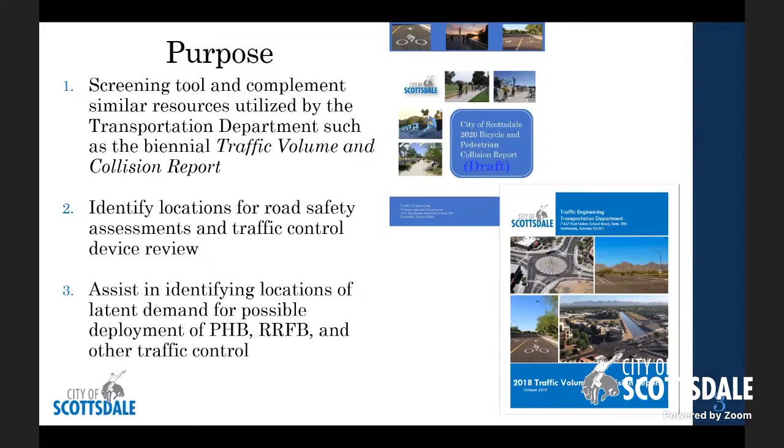Next, identify locations and corridors for capital improvement project investment. The next point is an important one: assist with identifying improvements necessary with private development. Having this data, having these kind of hotspots that we're anecdotally familiar with, but now that we have the data to support these locations, can help us in pre-app and development review meetings in order to identify these improvements that we could partner with our private development community.

Provide better, more targeted education and enforcement, and influence the design of new facilities. Pragmatically, this is a request that was brought forth from the Transportation Commission some time ago, and it's also been the desire of transportation management and staff to have this document in hand for the purposes that I just discussed.

Quick history: the last attempt to quantify our bicycle and pedestrian collisions occurred in the 2008 Transportation Master Plan, so nearly a dozen years ago. It was a good effort looking at a 10-year collision history by the number of collisions, by the severity, and again it was tabulated within the master plan. But there was a desire for management and staff and the Transportation Commission to get something that was more robust, more comprehensive, and more complete.

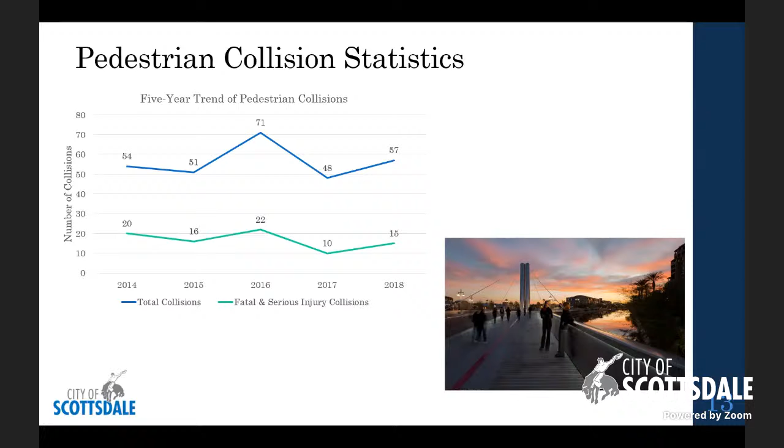So this is the 5-year trend of pedestrian collisions, similar line chart. You'll see the blip in 2016 and then back down in 2017, which would speak to this data compilation effort maybe being once every 3 years or every 5 years versus every 2 years for our vehicle collision manual.

281 pedestrian collisions over the 5 years, 56 annually. That's less than our bicycle collisions. That was kind of surprising.

63 serious injuries, 19 fatalities, and pedestrian collisions accounted for 1.3% of collisions over the 5 years. That second to last bullet I noted in bicycle collisions, I think bicycle was 4%, but 16% of pedestrian collisions involved a party that was impaired. So 4 times the number. I thought that was an interesting stat.

It is important to note at this point in the process of finalizing this document, no definitive conclusions have been drawn or derived as to why these things have occurred. I think that's an important conversation and discussion moving forward. But at this point, this is merely a data compilation effort and getting a final draft so that we can have those conversations moving forward.

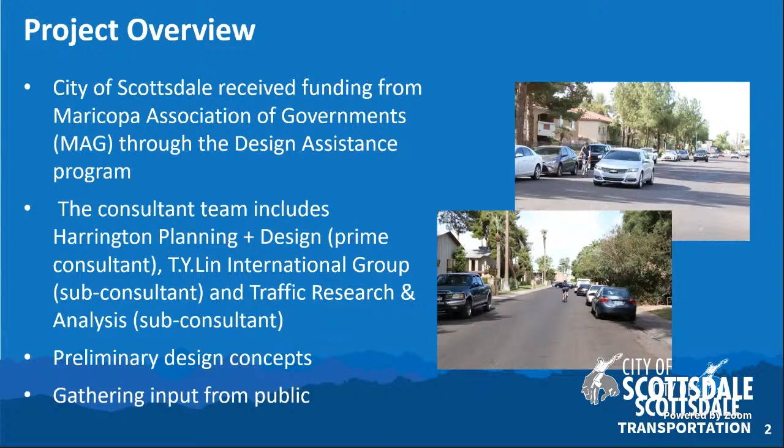The project is along a 2.5 mile corridor on 70th Street from Roosevelt Street and Continental Drive in the south at the Tempe border, all the way up to 2nd Street in Old Town Scottsdale. This is only within existing city right-of-way; we're not looking at anything outside of that. It's considered a low stress neighborhood route, and it connects a lot of other things, such as the existing bike route along Roosevelt Street in the south, the existing bike lanes on Indian School Road in Old Town, as well as the path along the Arizona Canal at the north end, and some upcoming bike lane projects on McDowell Road and Thomas Road.

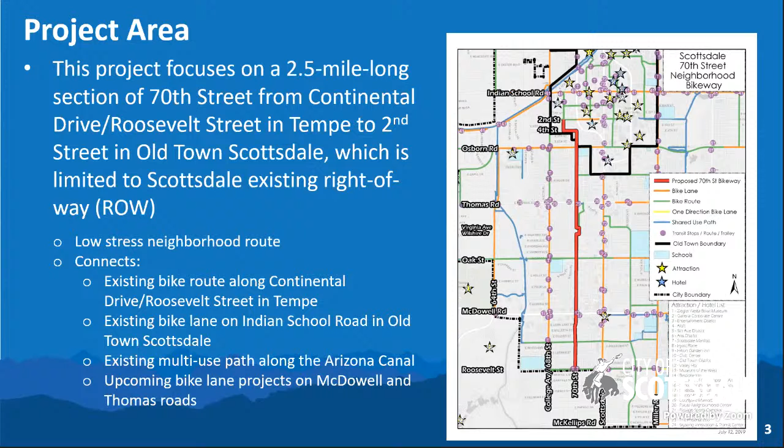The long-term goals for this include improving bike and pedestrian comfort, considering expanding traffic calming to bring vehicles to the proper speed, providing wayfinding and route signage to help people navigate through that area and route, some ADA connections and improvements, and really providing biking and walking connections to Old Town Scottsdale from the neighborhood.

Taking you to the project segments. Each area is a little bit different, so the consultant team divided the projects into 5 segments, characterized by how wide the existing right-of-way is in that area, as well as the adjacent types of land use. Starting from south to north, segment 1 is primarily single family homes in that neighborhood. Segment 2 runs from McDowell to Wilshire Drive, just south of Thomas Road.

Segment 3 is primarily an alley segment that was part of an earlier study several years ago. From Thomas Road to 4th Street, we start getting into more multifamily development from Thomas up to 4th Street. Segment 5, we've just recently changed this alignment. It'll continue going north up to 2nd Street. Before, in the early stages of this study, segment 5 was looking at taking a jog over to 69th and 4th Street up to Main Street. It just didn't end up being feasible. The team has looked at typical constraints in each segment.

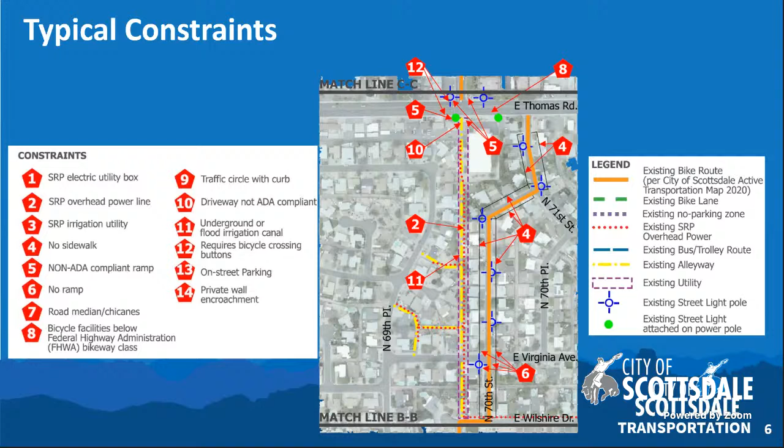Here are some images of those typical constraints, things such as the narrower width of some of these roads with on-street parking, which doesn't maybe give a lot of space for the bike environment. Also, there could be utility equipment that may limit the concepts that they come up with. No route signage or wayfinding, so if someone doesn't really know that neighborhood, they may not know that it can lead all the way from Tempe to Old Town easily. And then some sidewalk gaps.

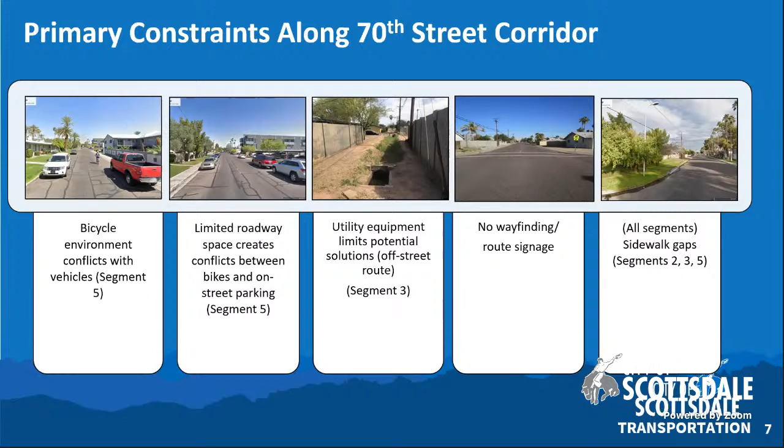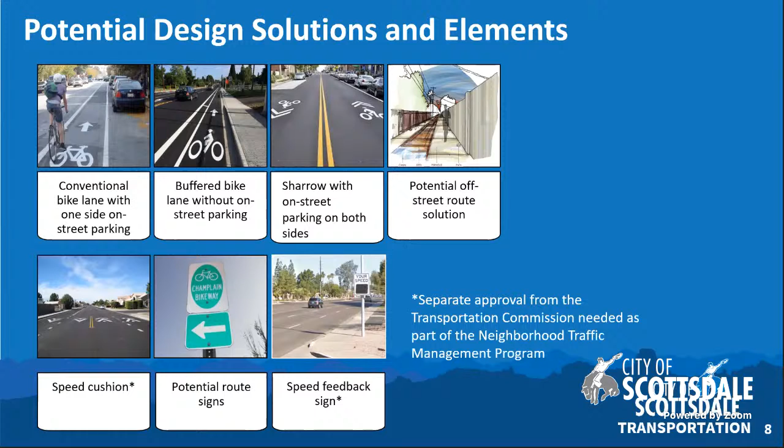They did come up with some potential design solutions to consider, such as a conventional bike lane, buffered bike lanes that may or may not have enough room for on-street parking. We're not considering removing parking as part of this, so part of the analysis has really looked at where do we have room to have both of those types of things, as well as sharrows when there's not enough space for any kind of striped bike lane or buffered bike lane. The different off-street options for the alleyway, things like speed cushions, speed feedback signs, those would need to receive separate approval from the Transportation Commission due to the policy for the neighborhood traffic management program. And then again, things like route signs to help direct people.

The public input that we've had so far was a virtual open house from November 17th to the 30th. It included most of the slides you've seen here in a recorded video presentation, as well as a questionnaire. We did have a pretty high number of responses - we received over 160 responses from people. We did a mailing and electronic notifications about the public open house so that we could spread the word.

Next steps would include reviewing this public input, further development of the concepts and ideas, an upcoming open house, tentatively probably going to go up for 2 weeks starting next week. And then the team will produce the final report for staff to utilize. From that point, moving forward into the future, any additional design or construction would need to receive additional funding, go through more public outreach, and the future improvements could happen in phases as well.

So if you need me to go back to any slides or if you have questions or comments, I'd be happy to answer your questions.

Thank you, Susan. This is Terry Anderson. Very, very informative presentation. Thank you. Good overview. Does anybody on the committee have any questions of Susan on this topic?

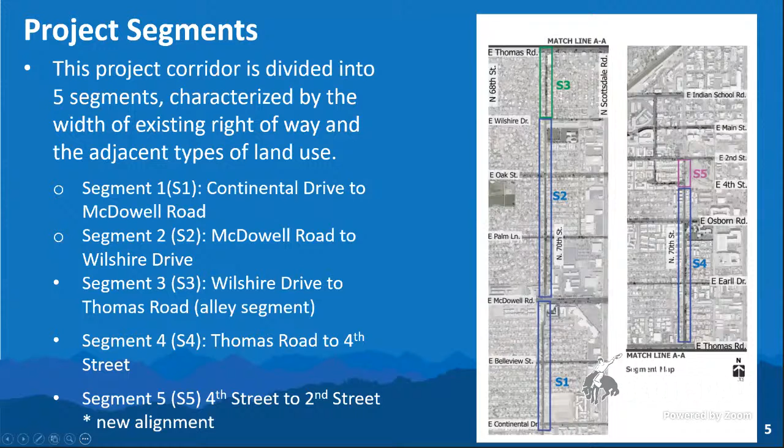Any other questions from committee members? If I don't see any hands, we'll move on down the road, to item number 6, the Old Town Bicycle Master Plan.

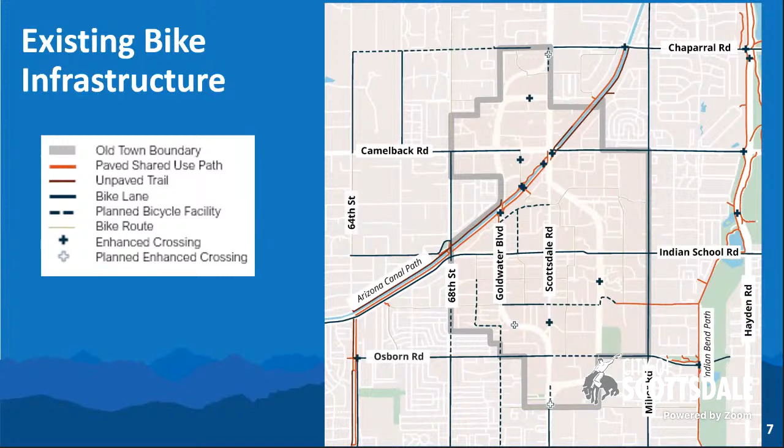I wonder if it had a dashed red line along that route you're talking about that zigzagged going east-west. Oh, okay, is it this gap analysis one that has the dashed line? No, not that one, I understand that one. It's this one, this one.

That alignment right there showed up dashed on two exhibits, and I wasn't sure what it meant because it wasn't in the legend. Oh, I'm sorry, I must have translated something different when we made the PDF. There were additional slides with this one, if we were going to go into more detail, where as we clicked through, the one we were talking about showed up as dashed just so you could identify it on this map. I wanted to shorten it for today, so that may have happened after you received your packet, but there's not any different alignment or anything that would have been shown there.

Thank you for asking, thank you too. Very, very informative. Any questions from any of the rest of the committee members? Well, thank you, two very nice presentations. We appreciate that.

Moving on to the next item, other transportation projects and program status. All right, thank you. Greg Davies is going to join for a few of these slides, but we just have a short update for you.

So Greg, just let me know when you need me to click through. Okay, thanks Susan. Good morning, Chair Anderson and members of the Paths Trails Subcommittee. I'm Greg Davies, Senior Transportation Planner with the City of Scottsdale, and today I'm going to give you a brief update on one trail rehabilitation project, a trail maintenance project, and two new construction trail projects. I guess I'm the trail guy, so I'll talk about trails, which is a very interesting mode that we have.

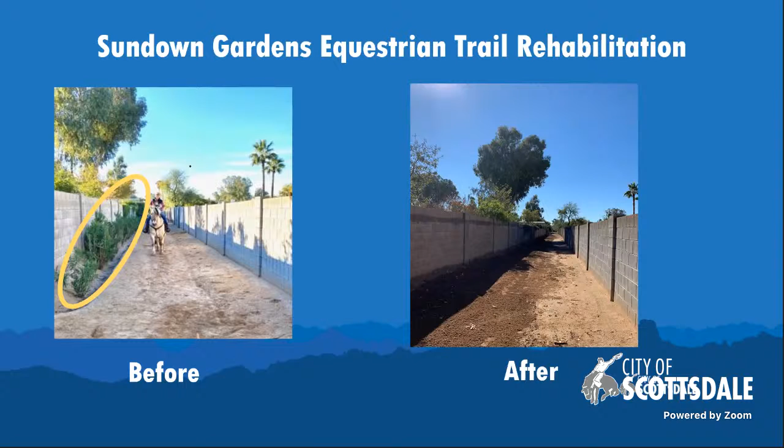There's a lot of equestrians in this area, and it connects to the Via Donna Trail, which was built around 2007. The Via Donna Trail runs east and west from Scottsdale Road to Pima Road, a very highly used trail. So that's the Hayden Trail rebuild - this will take place probably by the end of this month. I'm working with the contractor on that; he's going to give me an estimate, and we're getting very close to making this happen.

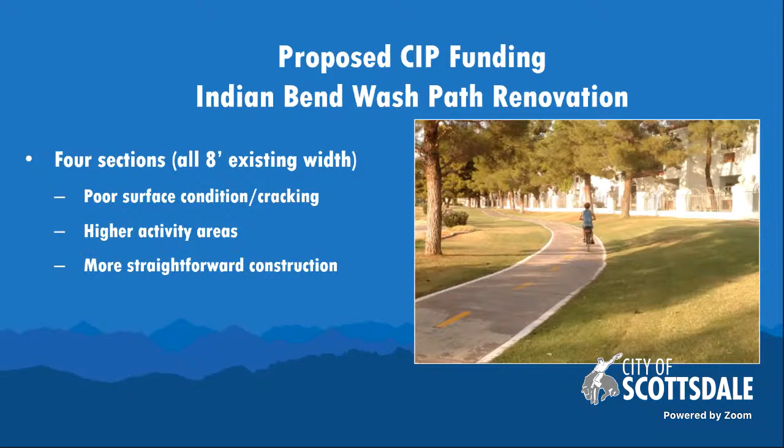A scooter ordinance update: Mark Melnichenko presented an update to the city council on January 19th. This included proposed updates to the city code relating to bicycles, e-bikes, and electric scooters, as well as introducing a draft ordinance on licensing for shared device providers to get feedback on what could happen with a future license. City council unanimously approved tabling any action on this item during that meeting so staff could return in the future with changes. There was feedback primarily about proposed parking restrictions for scooters, as well as sidewalk riding within portions of Old Town, plus other feedback from city council members. Staff are gathering more information and looking into further development of the draft licensing ordinance, since we were given comments on that, and we'll have updates in the future as we move forward with those changes.

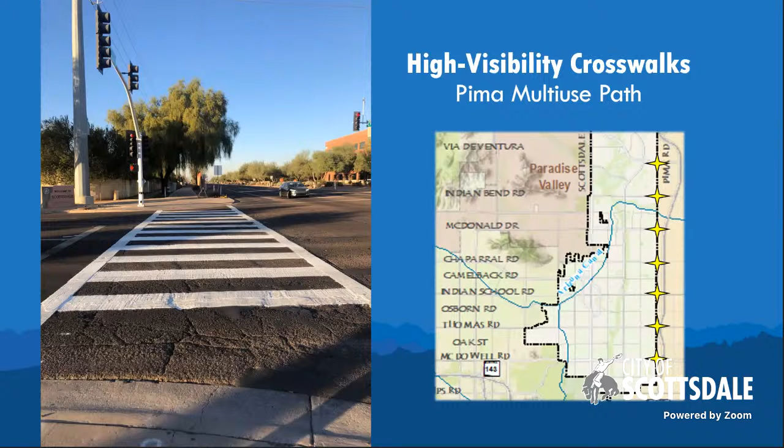Traffic engineering and street operations are currently looking at putting high visibility crosswalks at 7 locations along the Pima shared use path, as well as the bike route. If you're not familiar with this path, it kind of dips in and out of the neighborhood walls along 87th Terrace, but it's a continuous route that's either path or on street. These cross streets have normal traffic, so adding these high visibility crosswalks should help. Here's another image showing the difference in how it brings more attention to people crossing there, walking and biking.

If I could jump in real quick. Oh, please do. Just confirming all locations have been installed. Oh, okay, sorry about that. That's the good news, it's not coming up — that's already done. Look how quick we were able to do that. Thank you.

Those also help reduce turning conflicts. Also, a quick update if you haven't heard: a high intensity activated crosswalk, or pedestrian hybrid beacon, was installed on Scottsdale Road at Palm Lane. There was a pedestrian fatality in January 2019 at this location, when an elderly resident was crossing to the bus stop. There are a lot of destinations on both sides of Scottsdale Road here, as well as residential areas east and west through here. There was an in-lieu payment made by a developer on the northeast corner that helped pay for part of this crossing. Traffic engineering also were able to get a grant from Maricopa Association of Governments through their roadway safety program for $180,000 for the study and improvement.

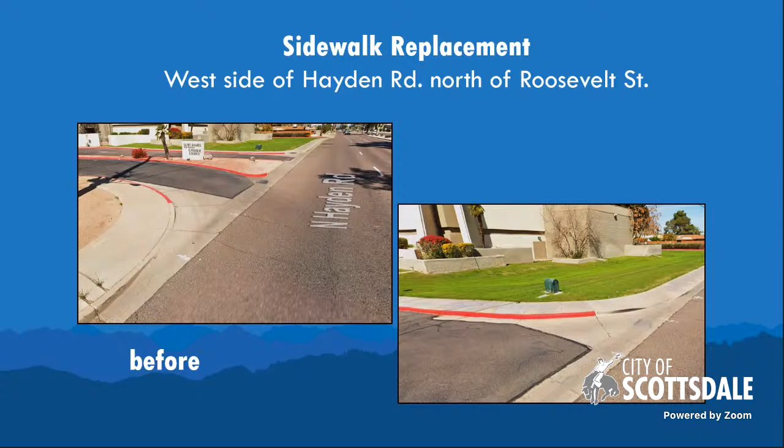Here's some pictures during the work to cut and pull that median back, and then add improved ramps and a better surface there.

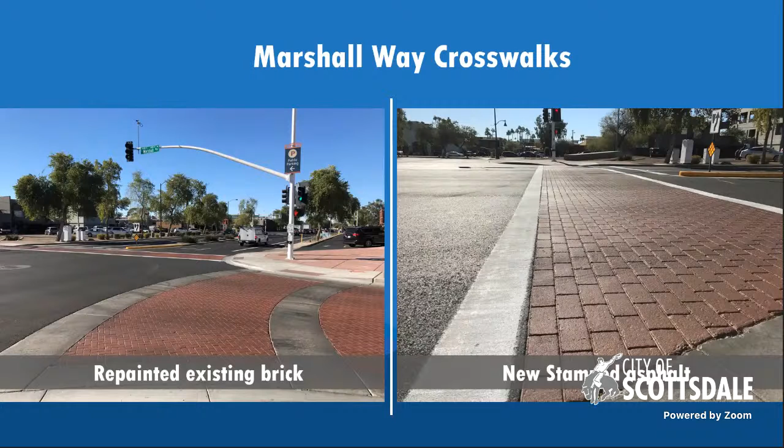Lastly, with the Indian School Road repaving project, it is now complete, from when we added those buffered bike lanes from 64th Street to Marshall Way. There's new stamped asphalt. Some of the existing brick that was a good surface was repainted to match. Some of the old crossings there used to have pavers and some metal edging. So what's there now is a much improved surface. And that concludes our updates.

Thank you, Susan and Greg. Thank you.

About a year ago, we had questions about the push button on the crosswalks, the pedestrian sensing crosswalk, where you didn't have to touch anything and it sensed you were there wanting to go across. Has anything been installed on those, or anything further done? I can find out more. I think I remember the one you're talking about, but we can get more information. I know they were talking about installing one, planning to install one, I believe off of Shea, 70th Street, someplace in that neighborhood. I just haven't heard anything to know if it was ever done. Okay, so we can get an update for you.

Okay, thank you. Does anybody else on the committee have any questions? I guess not. Well, thank you, Susan. Thank you, Greg. Thank you.

Moving on to identification of future agenda items. Does anybody on the committee have any agenda item they'd like to see coming up, or something they want to move up that the staff could work on?